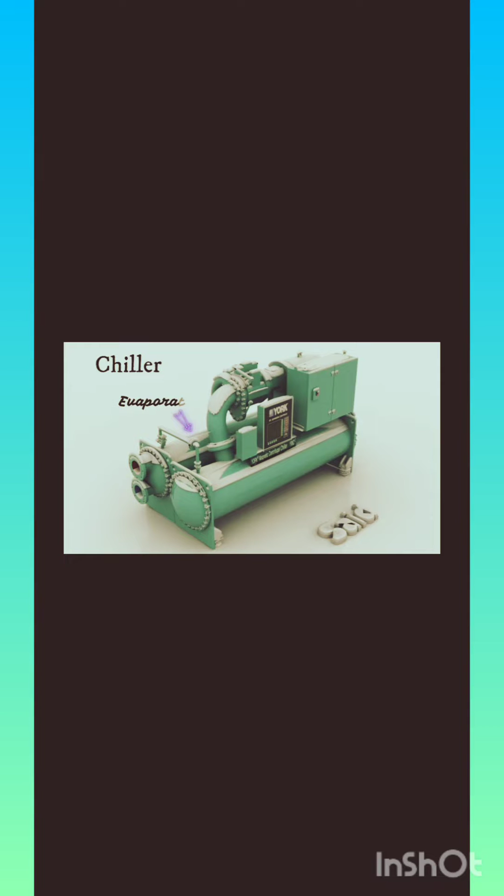Water-cooled chiller plant has 5 equipments: water-cooled chiller, condenser water pump, chilled water pump, cooling tower and AHU. There are 2 important parts in chiller: evaporator and condenser. AHU and chilled water pump are connected to the evaporator. Cooling tower and condenser water pump are connected to the condenser.

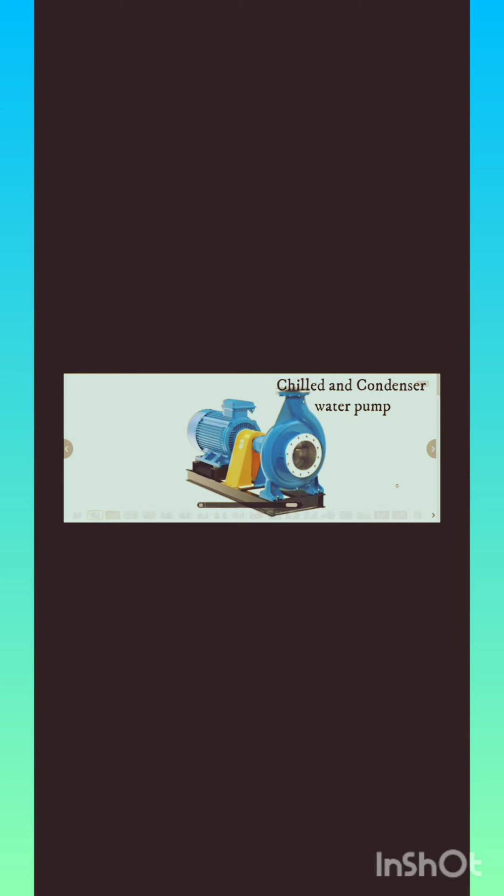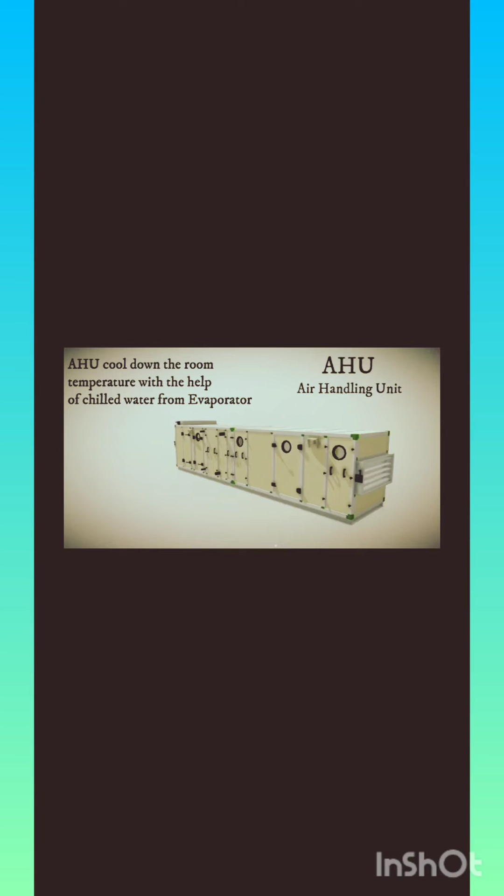Next, chilled water pump and condenser water pump. These 2 pumps are supplying water to the AHU and cooling tower. Next, AHU. Its job is to provide well-cooled air to the room using the water that comes from the evaporator of the chiller. Cooling tower. It reduces the temperature of the water coming from the condenser and sends it back to the condenser.

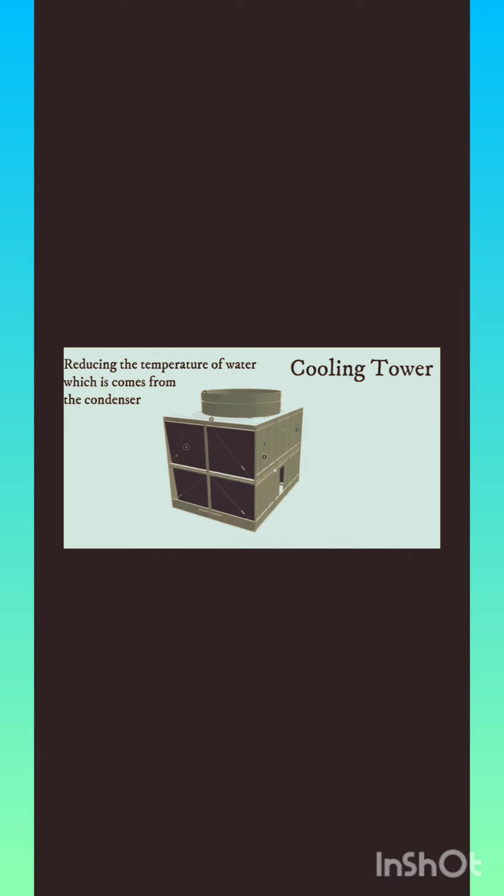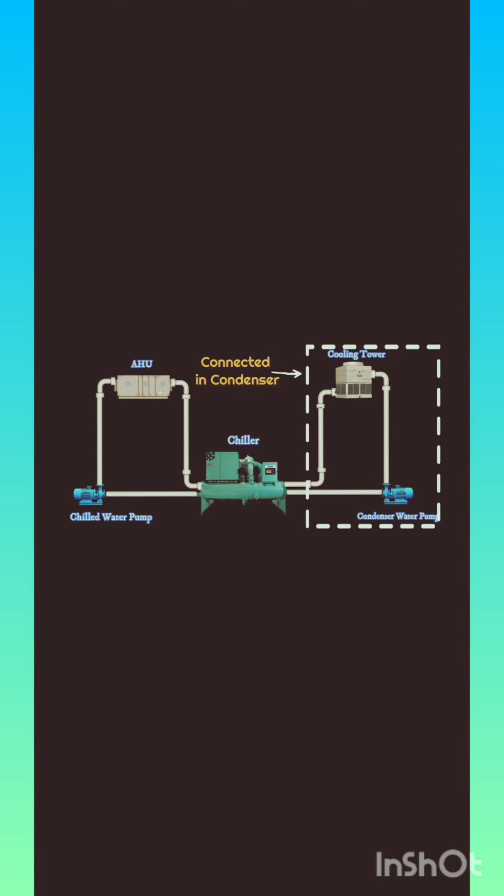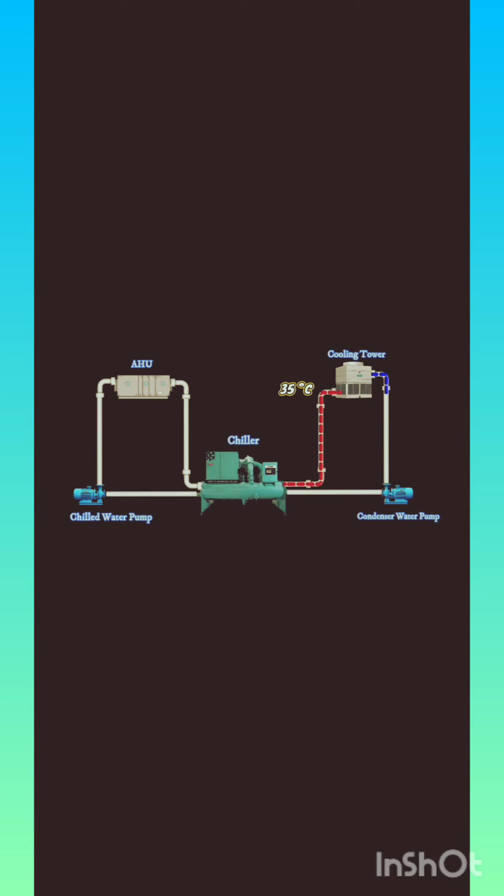Now, let's see its basic work. The cooling tower and the condenser water pump are connected to the condenser of the chiller. The AHU and the chilled water pump are connected to the evaporator of the chiller. The temperature of the water entering the cooling tower is 35 degrees Celsius. The cooling tower lowers the temperature of the water, leaving the cooling tower at a temperature of 30 degrees Celsius.

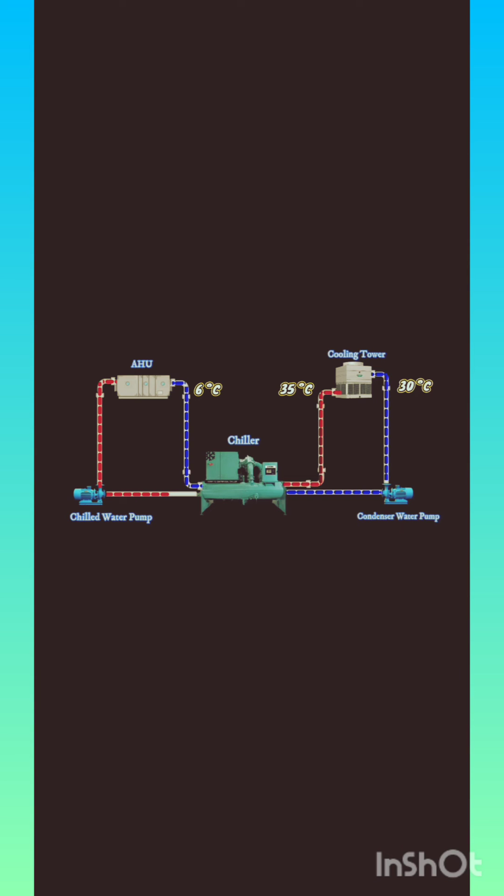This cycle continues. Chilled water pump sends the water from evaporator to the AHU. The temperature of the water entering the AHU is 6 degrees Celsius. The AHU takes the cooling in that water and sends the water out at a temperature of 12 degrees Celsius. Then, the water goes to the evaporator and gets cooled, and then again goes back into the AHU. This is the basic working principle of water-cooled chiller. We will see the details about each of these equipments in subsequent videos.